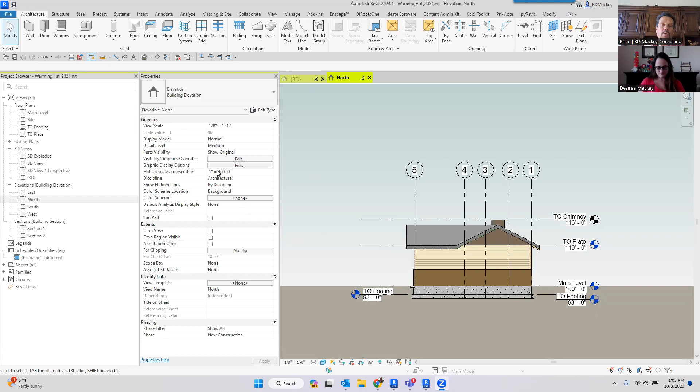So when you're in a presentation view or any view, you can go into your graphic display options and come back here and change the background. You do have options for background. You can say you want it to be gradient, or you can turn a sky on, which is so freaking dark—like, what sky is that dark blue? I don't know, but that is an option you have there.

Or you can always go in—and this is the one I want to show people—you can start putting some sort of image in. So you can grab an image, browse for it, and put it in there. This sometimes just helps a little bit when you're trying to do some sort of presentation view. Personally, for me, if I want just a color like a light blue in there, I just grab an image that's literally light blue. So that's one of those things I just wanted to bring out that you can work on there.

The other thing I did want to talk about—I'm just going to undo that because I can't deal with that dark blue. The other thing, this actually came up...

Desiree and I have a discussion because, as you know, she's got a new job and she's going through setting up Revit standards yet again for a client. This is one of those things I want to talk about, because depending on how you set it up, not necessarily just in your workflow, but having different views, tags, view types, or things like that for your working views or even for your regular views.

The client I was working with last week is a design build architect, working with a lot of contractors. What I was showing her is, if you're a contractor working in Revit, we've got our typical dimension string where we select the string and it's set up. But I don't think a lot of people know, if I wanted my default version, one after another, I can copy this to the clipboard, paste it in the same place, and drag that one into your dimension styles. This isn't something you have to do, but there are other ways to do this.

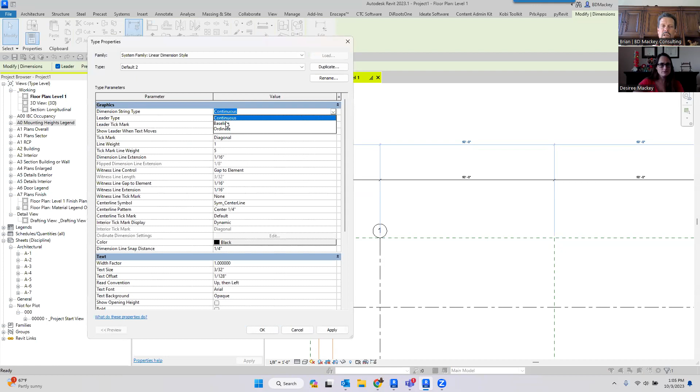Right now the default is continuous, but with that same dimension string, you can set up a baseline dimension if you wanted, or you could make it an ordinate dimension.

Not saying this is something you'd want to submit to buildings for permits, but if you're a design build firm or contracting firm, this might be easier for your guys to deal with. When I used to be out in the field framing, I'd hook my tape measure on the edge and just start going across doing the numbers myself, figuring this is 20, then this is 70, doing that math in my head. But we can set up different styles or types of things for people in the field, maybe a whole separate set of drawings.

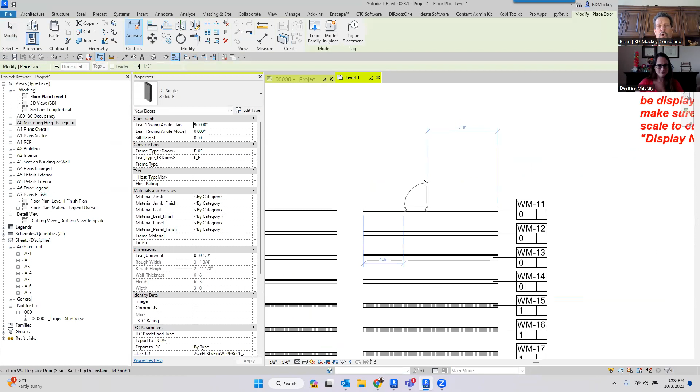The other thing I like to talk about is, for your own working views, having a whole bunch of things set up. If I come in here and look at this, I don't think I need a leader on this door tag. It looks like my standard door tag, but if I zoom in, I have other versions inside of here - fire rating, code width, actual width, all these different things. So you can start building your tags based on the data you want to be looking for.

Good morning, Melissa. Hey, I told everybody you might be like, nah, 5 a.m. is too damn early for me. Screw y'all.

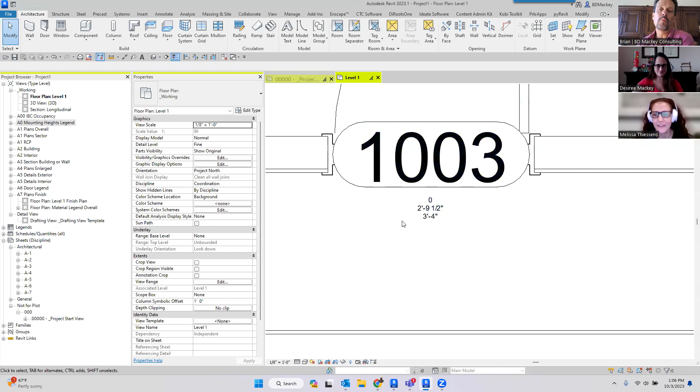So just think about different scenarios you're looking for and what you want to start doing. I know that's not the button I wanted. Desiree had a discussion and I liked it so much I already added it to mine.

Adding the view name to all of the working sections, because that way if people don't name them, it's really apparent on your working views in the plan - like, hey, this is just called Section 3, or if somebody forgot to name it. It also helps you go back into the project browser and find what it is, or start yelling at people to go create those.

Yeah, take credit for that one. That 100% came from one of my teammates.

So just think about this - you don't have to go with all your typical stuff. Think about having more of these working tags, working dimension strings, whatever it might be, that can help you or the guys on the field or whatever else you might be looking for.

I always say the same thing about view templates. I've got working view templates to put the view in wireframe, leaving just walls and room separation lines on, so I can literally see only those two things. Now I can start seeing where my room separation lines overlap with walls when I get all those Revit warnings. So I have a whole bunch of view templates to work through that way too.

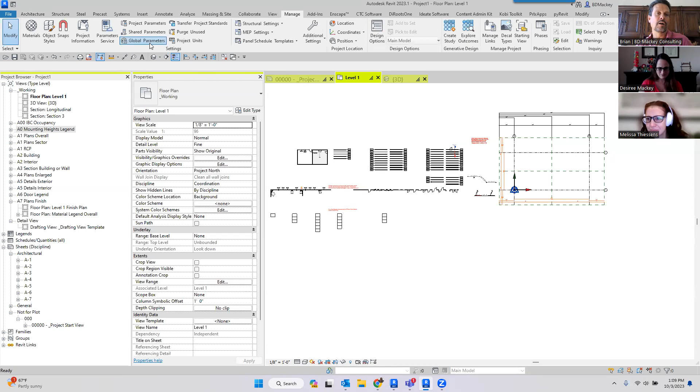The one I have in my template under global parameters is right here, and I call this my 'turn off for plot.' For years everybody's been asking, is there a no-plot layer like we had in AutoCAD? There is no such thing as a no-plot layer, though we may have invisible lines we can go through and look at.

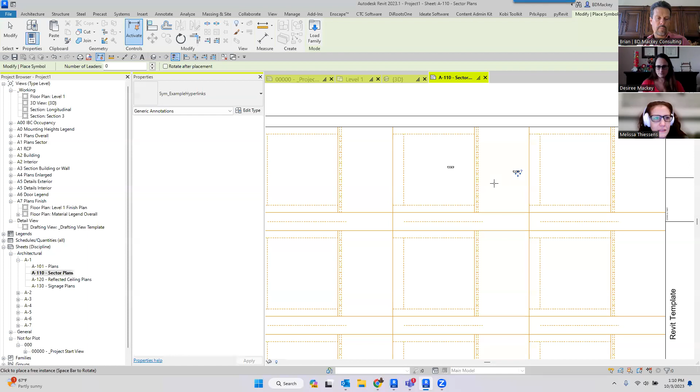Almost every firm has some sort of title block with guidelines inside it. I also have detail boxes with guidelines for people to see what's going on. I even created an annotation family that is my symbol—an example hyperlink I put down here so people can place it, then put text values. This is my text value, this is my additional note which is multi-line text, and I could even add a hyperlink. So I've got all this stuff inside here.

Behind the scenes, all of those things have visibility toggles like almost everybody has. I've linked those visibility toggles to my parameter called 'turn off for plot.' So if I go into my global parameters before I print, I can untick this. On a real project, unticking that can take 4 or 5 minutes if you've got 600 sheets and 5,000 details using this example hyperlink thing. But you'll notice it's all gone, just disappeared—they're still there. Now I can go hit print, or go back to my global parameter or hit undo, and bring all of that stuff back.

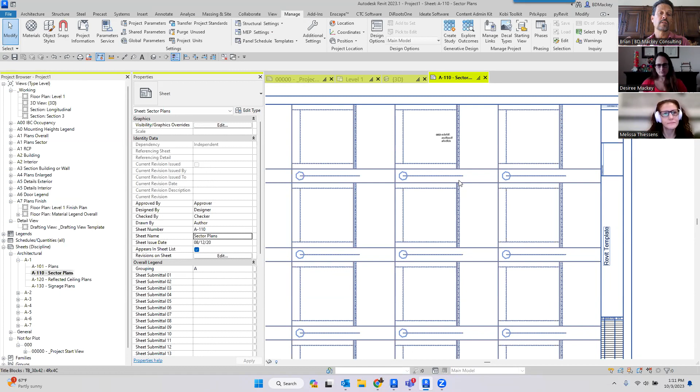So this was one where I was doing a presentation on global parameters, and somebody asked a question that clicked into my head saying, wow, this becomes huge—we can start linking things like this to global parameters. I've got to open up another file.

The other thing I like to talk about with global parameters, which is more not standard practice because we can link global parameters to a whole bunch of things, is that you can start using global parameters for 3D modeled stuff.

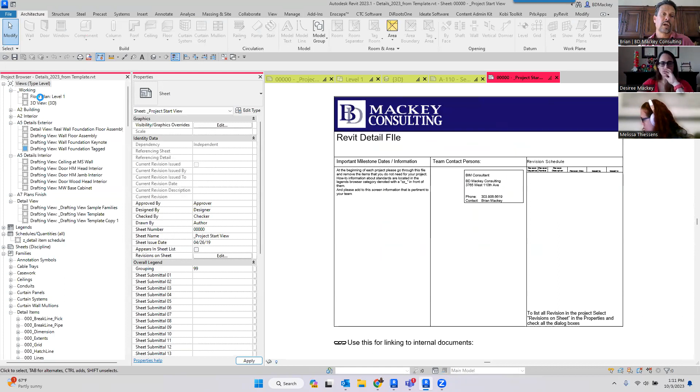In this example, I have a client who does this on all their projects: in my floor plan I have a slab. If I edit this, I want the floor, not all the structural framing. If I edit this boundary, I did a dimension from the grid line to the edge of my slab—it's a sketch line, not picked walls, nothing set there, I just drew a sketch line. Then inside my sketch mode, I did a dimension between the grid line and the slab edge.

This could be face of wall, whatever you're doing for this. I called it slab edge. I did that dimension, selected it, and associated it to a global parameter called slab edge. So now in my project, if that slab edge detail isn't 6 3/8 of an inch, I need to go to that global parameter and change the slab edge value to something different, like a foot. It's going to adjust my floor accordingly.

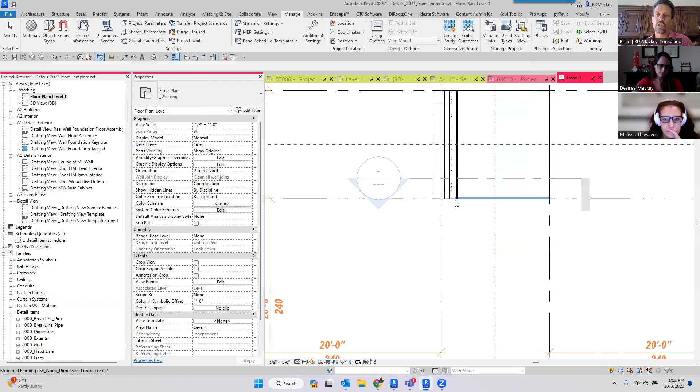But what's cool is if I go into my 2D detail, I think it's this one. I have drawn the detail item in one of these 2D details. I don't remember which one I did it in. I think it was this one. Maybe it was this one.

So in this one, you can see I now have a slab edge. It looks like I broke it and did something wrong, but I should have dimensioned that not from the edge of the plywood, but to here. So now when I go through and change that global parameter, it's not only going to update the 3D model, it's updating the rim joist, because the rim joist is going to move independent of the floor itself.

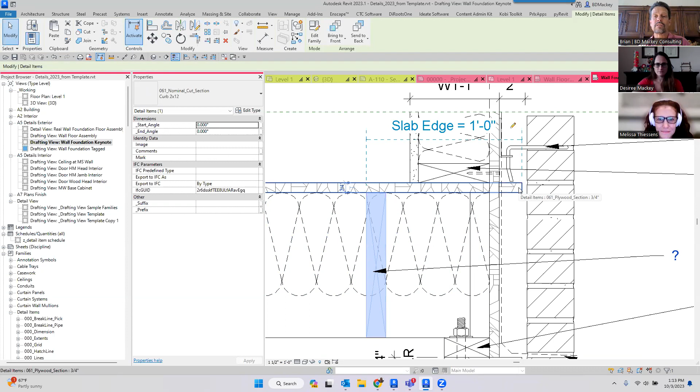So I maybe have dimensioned it to the rim joist, maybe to this detail component, which is the plywood, whatever. But you can start linking those global parameters not only to the 3D model elements, but using those same dimensions, linking it to the dimensional side of things as well. So yeah, there's a ton of different options for that.

You're gonna have to talk faster. You have a ton of questions. I have a ton of questions coming. Okay, I got one more to do on this one. I just got to find... conference. So that's all we need is Mackey talking faster.

Global. The other one that I came up with, and this was a conference. Come on, I'm in my search in Windows 11, global.

So one of the things that came up is global parameters in design options. Does anybody remember what presentation I did that one on? RTC or BILT 2022.

Do you find that in larger user environments, folks have a harder time tracking those sorts of uses on global parameters? Yeah, so definitely on that. It's one of those things where the team needs to understand it. I had a client where somebody went in and deleted the floor, which probably had 35 or 40 sketch or global parameters assigned to dimensions. All of those global parameters were lost.

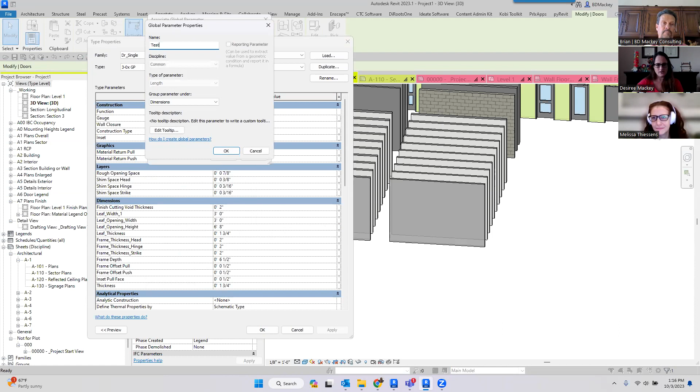We're just going to call this one my test. So I've got this test global parameter now, and I've got this dimension set up to the global parameter height. Well, I also want to come in here and put a reveal in, right? So maybe it's going to be curtain wall mullions, anything like that you can start thinking of.

So I'm going to go to the architecture tab, go to wall, go to reveal, and put a reveal in here. I'm going to say done. Now, when I select this reveal, I want to make this permanent, but I'm in 3D, so let me go to an elevation view. Oops, wrong project.

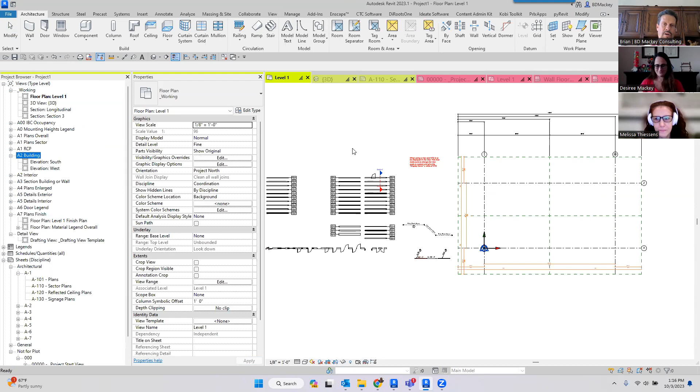Let me go into an elevation. I was just working with that, that's details. I don't have a north elevation. Cool, fine, let's do a section. Look at this here, flip it. Change it. There we go.

Link to your blog in the chat. Oh, thanks, Tom. Yeah, there we go. There's one of my blogs too. Well, there you go. Great, that's all you need.

So now I've got this global parameter, right? And if we were trying to move a reveal and adjust the door, we would have to copy this whole wall along with the reveal, along with the door, into a different design option. And then that wall wants to move out 6 feet, something like that. I've got to go move that wall as well.

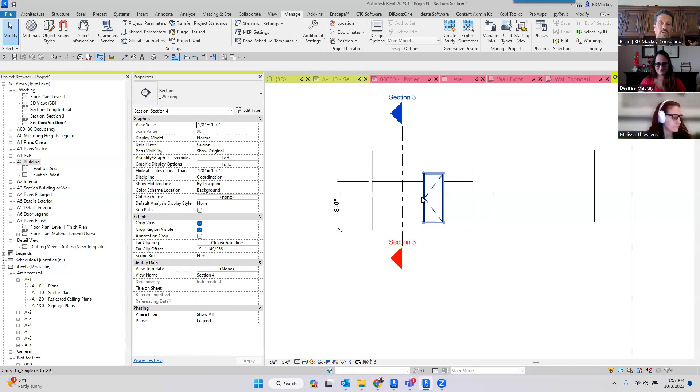But the beauty of this is now that that's a global parameter, I can come in here and say, okay, cool, let's just go to my global parameters and take that test parameter and say, that should have been at 8 feet. And since I've set this up, I've now changed not only the height of the door, it moved the wall. Like I said, that reveal should have went to the level, not to the bottom of the wall. That was cool, wasn't expecting that.

But I can start setting this up to make those reveals move, make the curtain wall grid lines move, anything that you're talking about like that as well.

So the reason why I did this is I had a client, they were doing this giant convention center. And that was one of the options, like, oh, well, we want to change this, the doors maybe to be from 8 feet to 10 feet or whatever it was. We want to make, then if we do that, the louver heights have to change, the door heights have to change. And there's this whole string of things that we're going to go through.

And I'm like, I really don't want to have to copy the entire exterior of the building to do this. So I also, because you don't know now, am I on option A or option B, we actually created 3D model text that we would put in the view. And therefore, when we printed a view, we'd have it say option A or option B. And we also got crazy with formulas.

So in those global parameters, we said, let me go create a new one here, and we'll just call this option A. We made it a yes/no parameter. Cool, and basically we said, okay, if option A, then 7, else 9, right?

So we created a little toggle that basically when you toggled this, boom, all of those different things would start to move. So in their project, they toggled option A, and when they did that, boom, this all went to there.

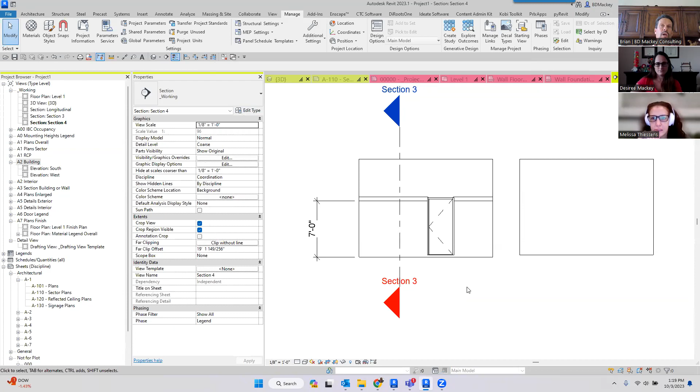Downside to this is you have to toggle it, print, toggle it again, print again for your option A and option B. And rather than even setting up two separate sheets, like I said, we created model text in here or symbols, we did both. And then we basically said, if it says option A, the text will be option A. If it says option B, the text will be option B. So we were able to, when you were printing, know which option you were printing based on what was toggled.

So yeah, global parameters are much more than just what you see out of the box, people associating them to materials or a few other things. You can take this pretty far.

And when I taught one of my global sessions at AU, one of the tract home builders came up to me and said, this is intriguing. They've been doing this with other ways, but they're going, man, this could really start taking into consideration a lot more of what we could do, for, oh, if you toggle option A, that means the garage gets 6 feet longer.

We could move the grid line, we could move the walls. If roofs are picked with the pick walls tool, the roof's going to follow along. So in some of their different design options for these homes, they wanted to go from option A to option B and have the windows get bigger or something like that. Unfortunately, we can't use it for family types, so you'd still have to swap out the family types. But in their early preliminary designs, it was a beautiful tool for them to start setting up.

Hopefully that answers that, along with thanks to Tom for clicking a link to my blog on global parameters. I don't even know if that one got into design options, I'll click the link because I can't even remember if it gets into design options as well.

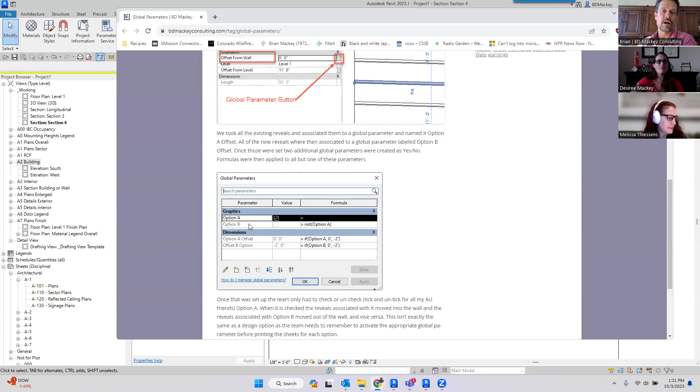Yeah, look at that, another one. So here we go. You can see I got in there option A, option B for the global parameter button. This literally came from working with my client - oh, we needed to move this up or down, or if there was option B, there was only two, so we toggled it off, etc. We got really far into figuring out what's going on here and what's not. And since you can't toggle off reveals, we actually just use the offset from wall. So there's a lot of things you can do with global parameters. As a follow-up, you just need to make sure the entire team knows, hey, we're going crazy on the global options on this one.

I'll just go in order so I can catch up with the ones that came in to begin with. Oh my goodness, you've got like 5 hours of content here. Using railing supports as balusters - thoughts? Absolutely.

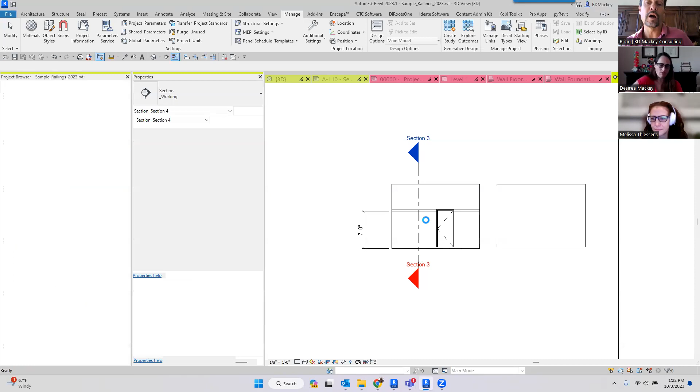Yeah, this is something I talked about very early on with a sample railing. I don't remember when we got railing supports, a long time ago. Tom here had tweeted out a question to the group like, hey, how do you do spiral barbed wire fences? This was because of Tom. I already had a barbed wire fence family here, but then you start looking at it - let me rotate so you can see. I had normal barbed wire, and Tom's like, how can we do this?

This is one of those things where if I tab select, you can see this is a railing support. One of the nice things about railing supports is you can say, hey, keep repeating this. And it's not like a baluster - you can come through and do better shapes than you can with balusters, and you have more control over them.

The other reason I really love supports in lieu of balusters is we've all probably come in and created some sort of glass type handrail like this. But when you get into it, you're like, cool, but I have a weird size in the corner, or I need to align this with something else. If I grab a support, I can always unpin it and move it wherever I want it to go.

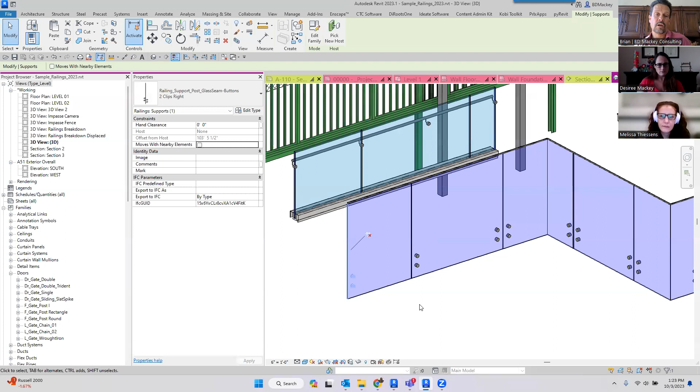So that's how I got the one over here. This one's still using the default supports, all the 4-clip, but at the first one I had to tab select to get to it, unpin it, and change it to be the 2 clips on the right side or the 2 clips on the left side, etc. So yes, you can go through and start setting those all up.

Even on just a typical standard handrail - oh, this is really cool, but I want to be able to grab this support and this baluster and move it. Cool, that's not a baluster, this is simply a support. So now I can put those wherever I wanted and start moving it and doing what I want to do with it.

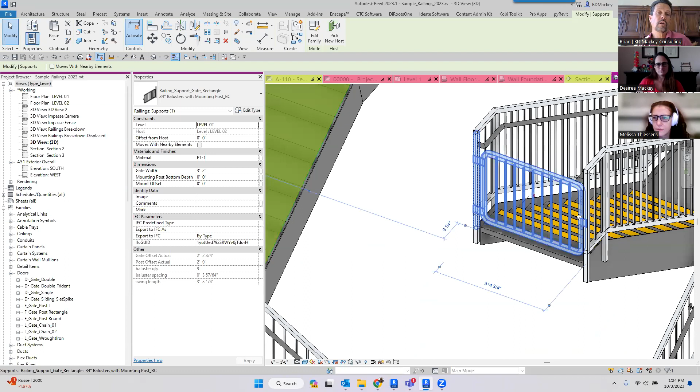Even to the fact, like up here, this little gate you see - this is my first support. So this handrail is not using balusters but supports, and I just went ahead and selected the very first support and swapped it out to be a rectangular support with a gate. Now, granted, I've got to have 34-inch, 36-inch, whatever different sizes I'll need, but I have the capability to do that. So yeah, I am a big proponent of using supports in lieu of balusters all over the place. I don't do it everywhere, but I do it in a lot of locations.

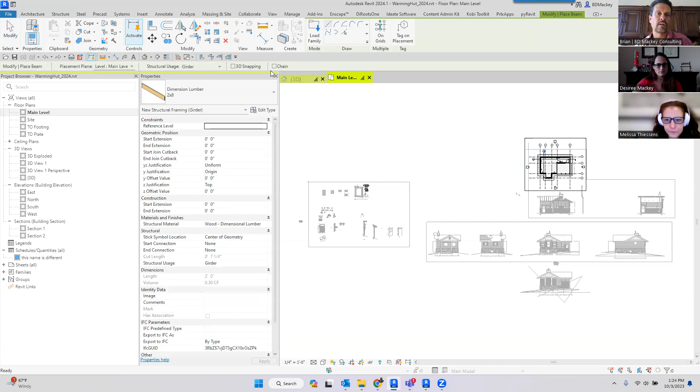Is there a good way to disallow join for multiple beams? I don't know if there is. I was trying to think of an answer for this, because it's not like you can just go back. I feel like the opposite is often true - you want them to stay connected and then they don't. Like you hit tab to select a chain of beams or lines, and suddenly you only get 3 instead of the whole thing. I was trying to think, if I go to beam, there's no disallow join option like we get when drawing walls. Right, it is what it is.

Could you select every other one, move them all up to break it, then move them back down? But they'd grab each other again. Even if you selected all instances, you'd have to do every other one to break them. The only way to disallow join on those is to right click on the grip and say disallow join. So it's not like you can even do that without using some sort of add-in utility. I don't think there's a way to globally or quickly disallow join on structural framing.

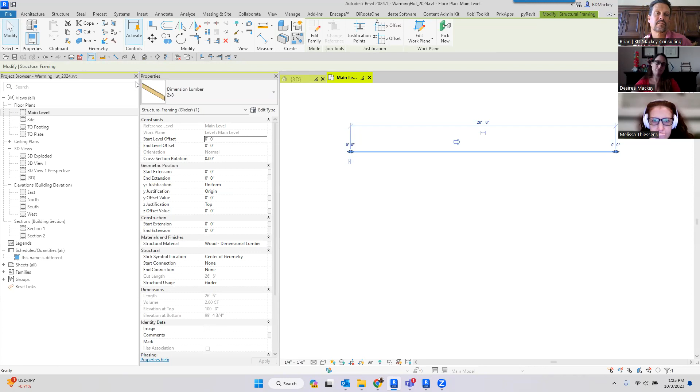Can you disallow the join as you're drawing, like on walls? No, I can't, because there's no disallow join button here. Right, we've got nothing for you on this one.

If you disallow join and then copy it around, is that at least better? Oh yeah, I think that's true, Melissa. Until you have to stretch it - does it try to grab again, or will it remember disallow? No, it's disallowed here and here. So let's try another beam, the perpendicular one, copy it down and see if it tries to grab it. Still copied over disallowed, even when you stretch it. Huh, even if I did that - so there you go. See, Melissa's got a good answer, and she's half asleep. Everything is disallowed.

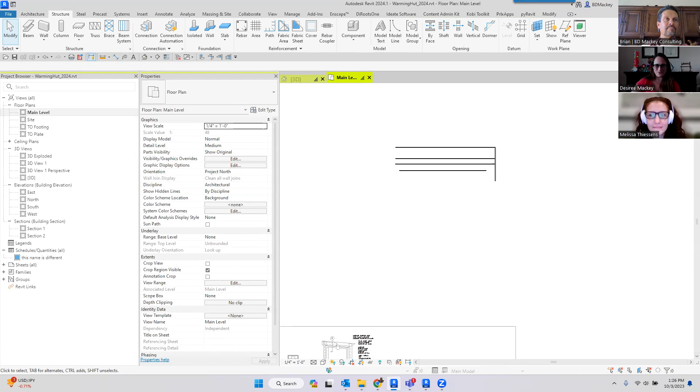Hey, it's cool, daylight savings was Sunday, so it's 6:30, it's totally fine. Oh that's right, you guys are in the middle of daylight savings there, which we're not on for another 3 weeks. Yeah, only for a couple weeks and then back to normal. I'm gonna be all messed up - Australia goes first, and then Ireland goes before us too. So all my countries are gonna be messed up, I can't keep track of what time it is anywhere.

Okay, last one I think before Melissa has them. How do you recommend cleaning family subcategories on the project? We're trying to swap some that have typos, for example glass with 1 S versus glass with 2 S's, or find other ways to get rid of unnecessary categories. First off, why are your categories material specific? I have problems with that. But barring that aside, because you can put it on the glass subcategory but call it metal, and then it's just confusing. I say that with doors too - the out of the box door categories, that's what we have.

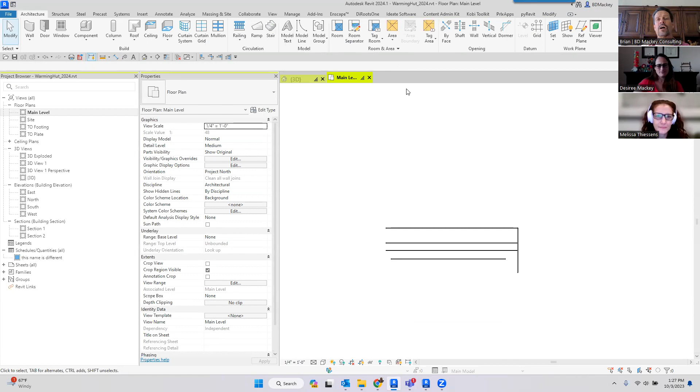Personally, for me, there's a lot of different tools out there. I use Ideate for all of this, and I know this is an add-in tool, and I don't usually plug these on Revit Radio. But with Ideate, they've got Style Manager - you can do something similar with Guardian too, it will let you do it. When I go into Style Manager, I can start seeing all of the object styles in a project. If I analyze that, it will then tell me all the families that are using that object style.

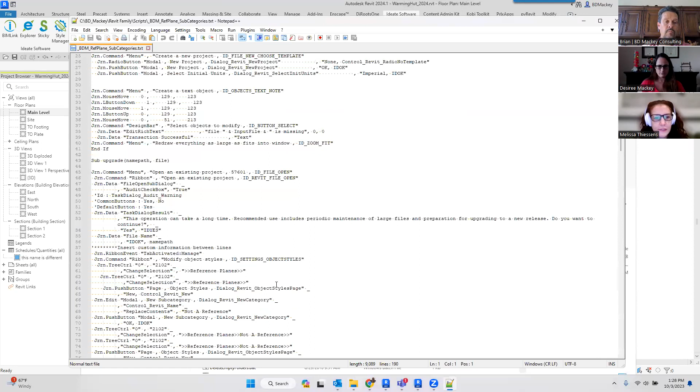I don't think using native Revit to try to do all of this is going to be easy. Now, you could use scripts, which I do have - by scripts I mean journal files in Revit. So if I go into my Revit families, into my scripts, I have a lot of different journal files that will set this up. If I came in here to, like, reference plane subcategories and edit this with Notepad++, you're going to see that inside here. I'm coming down here trying to say, let's go create this new category, not a reference. So I've come through here and said, I can go in and create new categories, I could even go through and rename categories. So when I get certain clients, they're going to say, I wanted to rename your category from this to that, etc. I'm trying to see if I have any of those in here.

I've taught this at AU, so it's there if you want to download the presentation, and you can use a journal file for that. But again, a journal file will fail if it doesn't meet the criteria. I'm sure there are other add-in utilities, I know Guardian has one, and I'm sure you could probably do it with Dynamo too, but manually trying to go through and do that becomes a pain.

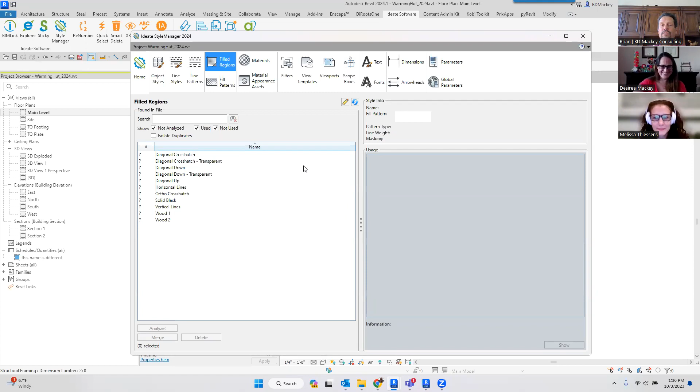It'll go through and start letting you know, oh, these are the families that are still wrong, so you can go edit those families to change it. This tool isn't going to edit the families for you, but at least it'll give you a list of the families you know you need to go change.

Inside of a project, you can just say, I don't want parking stripe in there at all, and delete that. If I delete it, the family is now just going to use the parent category instead — so it'll use the parking category, not the subcategory of parking space or parking stripe.

So that's just one of those things for me when you start looking at it. That's what I go through and start getting into. Hopefully that answers the question. Natively, there's not an easy way to do it — I'd be using some sort of add-in utility. And even if you've got to buy that utility for a year, it's probably going to save you the money it would take to manually go through and fix all that.

Ideate's getting some love in the chat. Too bad we don't have anybody on the call, I don't think, from Ideate.

I think Guardian will do the same thing, and Guardian might even — I'm not 100% positive — say which families need fixed, and there might even be a way to tell Guardian to go back and fix those families, but I could be incorrect in that. Okay, all yours, Melissa.

Michael says CTC also. Yeah, CTC I know has one. Oh, Ideate's cheaper than Guardian. I always assumed Ideate was kind of on the spendy side. It's a bit on the spendy side. I mean, but I don't know.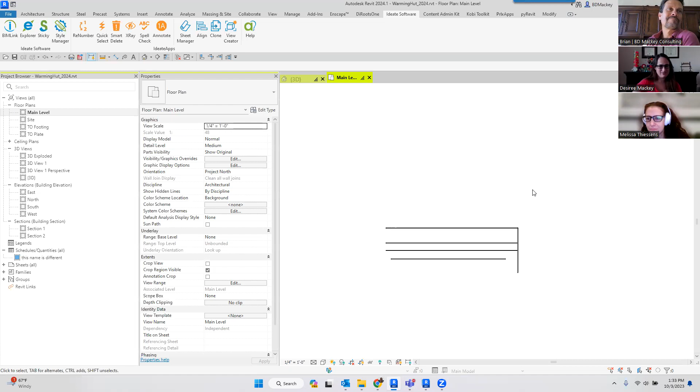Loving the chatter, you guys are feisty today. You mean yesterday? You mean yesterday? You guys are feisty yesterday. We're feisty yesterday.

Okay, all right, what's our next one? Well, next one we have. Oh, did you? No, I was just saying. Go ahead, I think you have them all now. I think so. You can go hurry and spell check everything that you've ever written. That's so nice of Brian.

So since you were talking about journal files, Sarah was asking, they recently decided to make a section tail flag for details a little smaller. The template setting is easy, but we have active projects that we would like to fix these in. Is there a way to automate or batch that? So they just want to change the detail call out, not the building or wall sections.

If you did transfer project standards, would that work? I don't think it actually carries all the way through, last time I tried that, because it seems like it should. Let's go to 23, because I know I have 2 projects open here. Let's go to manage, transfer project standards, check none.

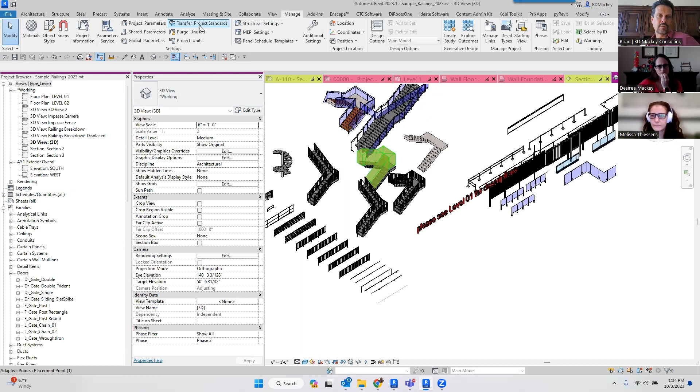I think you're going to get all of them. And even then you're opening all the projects, right, and doing it all at once. Yeah, but when it's better than if I manually remember going right through, it doesn't actually set something, but maybe that's fixed now because I gave up back in like 2020.

Well, I'm not even seeing like section tag types. It's going to transfer those. So as long as you didn't rename it, I think it would swap the section tags out. Let's see. You know, okay, try it, because I remember thinking it should work, and then it just didn't follow all the steps. Oh, so yeah, it would overwrite just the detail ones.

Well, brought this one across and gave me the number. It seems a little blind though. Like I know it'd be more labor intensive, but to load it in and swap out the definition for just the details, I guess it didn't. Where's that summer intern? Summer intern.

Well, the one thing that even if you renamed the family, I always try to show people is if you right click in the project browser on a family, you can say reload. So yeah, even if you came across and said, hey, we renamed this to be, it used to be called section head working, and now we call it section head working with detail. Don't go load that family in and swap that crap out. Come over here in the project browser and say reload. Because when you say reload, then it's basically just going to swap out X for Y.

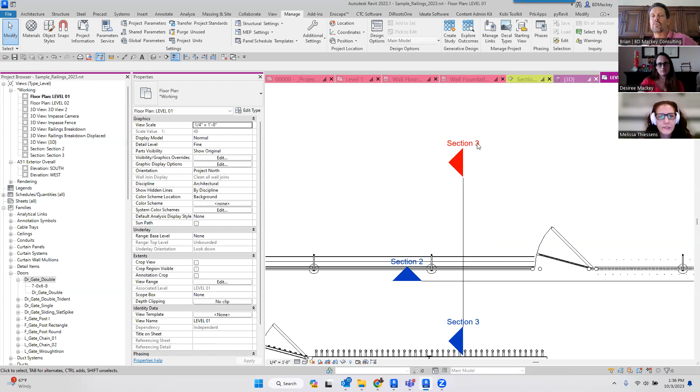I think what Brian's trying to say is that if it's named the same, it'll swap. And if you have your detail tail different than your section tail, if you reload the family with the two types, right. But even with that said, so if I renamed it, yeah, this one was just called section head working, and I added this to it. There wasn't any other properties. It updated in here automatically. So yes, going into the manage additional settings.

Annotations, section tags, zoom helps. If you've changed the detail it's using, yes, you've got to go through and do that. But if you're just swapping the family out and it was using the same exact name, it should just work.

So my guess is if they just changed the section ones, they probably were all using the same tail or head. Would that be correct, Sarah? Because I feel like that's the issue I ran into as well. Unless they created a new one, called something different, and it was already using a separate one, that would be easier.

But what it makes it sound like is she said we created one for details. It makes it sound like it was a new one. Correct me if I'm wrong, Sarah. But once you've loaded it in here, yeah, so it'll work.

But now you're still going to have to go in and say, I want to grab all the ones that are details and swap them out. Now that's not going to be horrible because you're literally going to grab one of them, come up here to the edit type, and change it out to use the appropriate head.

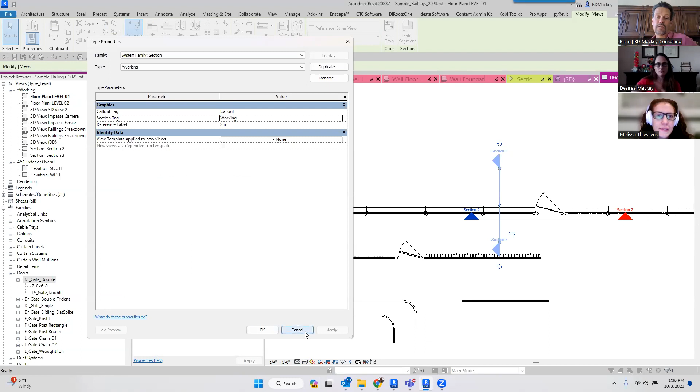You're going to have to come in here because you've loaded it in, just swap it out to be the right type of view. But yeah, you've loaded it in there, but you're still going to have to choose which sections, which ones were details versus this, etc.

You're still opening every project. Could you run a journal file for those steps? You can't, but you don't know which sections you're grabbing, right? I mean, I guess you're grabbing view types more than likely and just saying, hey, swap this view type out. If they were already their own view type, then sure, edit type, and you're going to bring this in here.

And if that's the case, I would think you could just right click and say copy - can't copy views, what am I thinking here. Because for the drafting view, you could copy the drafting view type, it would bring it across along with the section head. But if it's a live view, then it's not going to. So yeah, I got nothing.

Yeah, summer intern it is. We're just trying to make America great again by hiring a whole bunch of interns to do manual work. Making sure everybody gets interns. Sorry, I've been watching too many political ads lately.

But you made me think I'm actually going to open my template right now and make sure I have those things named separately in case I want to change them. Good idea.

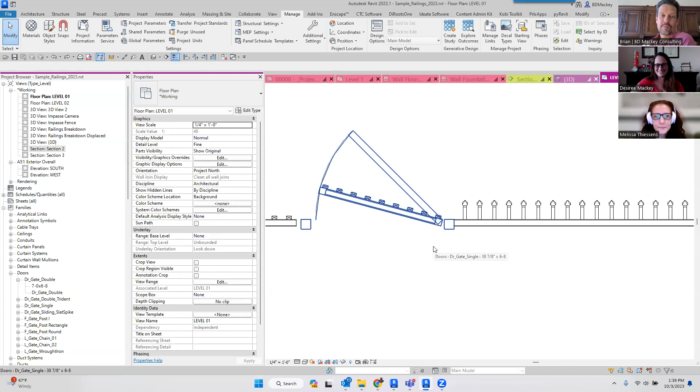Wow, my gate family broke. Gotta go look at my gate family. Okay, all right, what else we got?

Well, there is actually one that is 2022 specific, so maybe you should start opening that so we can test and see if it works for you.

Beautiful. And in the meantime, I apologize to Sarah. Sorry, there's no easy button for that. It seems like there should be, and yet no.

I have a different one for my working sections, but my printing sections and my details are the same. Dang it, Sarah, now I have to change them.

Let's see, well, that's opening. John is saying, huge fan of your link detail strategy. Any new updates since the AU 2013 presentation?

Look at that, a decade on. I think I already have it. Yep, it's changed over the years, and I don't remember which one was which. Yeah, this is my details one. Couple of things that I know I've changed probably since the last time I presented this at AU.

Am I in the details file? That's not the details file. I just got to figure out which file. No, that's the handrails file. The pink is the details file. So probably only a couple things that I've really changed.

One, I did talk about possibly linking global parameters to this stuff as well. But one of the other things when we start getting into it, is I started taking the use of filters more into play when I look at things. So still talk about everything being intelligent, etc. But one of the things for me, if I were to come in here and grab this concrete, I'm going to go back to fat lines too - this will be a little bit more impressive in fat lines.

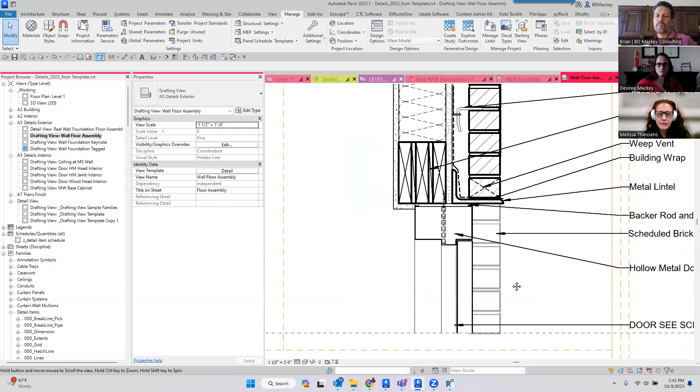If I were to come into the comments and type something in like beyond or existing, the second I type in that word beyond, I'm going to get beyond because my tag's looking at that comment, but I also have filters coming in to start displaying what's going on. So for this view, I've got these bricks here. I didn't want to have to go through into these bricks, right click, override graphics in view, hide this, change the line weights to be gray, and I was going through doing that. But once they gave us filters for detail items, now I can just add the word beyond to it and it'll start coming into play.

If I select host and come into this brick here and change it from beyond to like existing, I have a filter for existing where it leaves the hatch pattern, but just changes it to be gray. So I've added a lot of filters to start controlling some of those things I'm looking for.

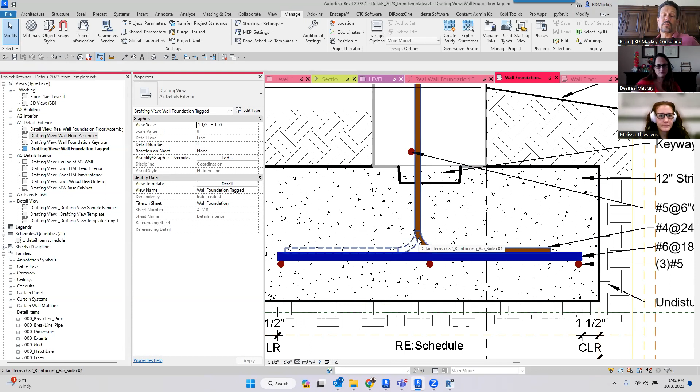Same thing for my structural engineers. I have filters for 3D rebar as well as 2D rebar, so if I change this from a number 5 to a number 6, the color changes. So my 3D rebar and 2D rebar are all color coded based off size, and I'm not creating different families for that, I'm using filters. I stole this idea from one of my Canadian clients way back when—they wanted different sizes to be different colors, but we didn't have filters back then. So literally, in the family, I created 35 extrusions or filled regions, all different colors, the exact same thing over and over. So number 6 could be purple, number 7 or the M10 could be whatever, going through and setting that. I've really taken filters into consideration.

I can't remember if 2013 we could actually do schedules, but I now use schedules for all my detail components—not just to see what's going on in the project, but to spell check, because I might have spelled some comments or suffixes wrong. So I come in here and say, what am I having inside of here? What's going to go inside of here? Exporting this out to Excel, doing a spell check in Excel, making sure it's all correct—I've done that stuff too.

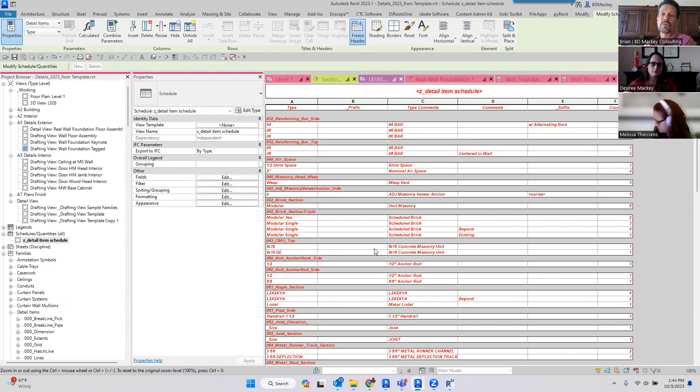And even more, I don't think this is in 23.1, I can't remember—was it 23.1? It was. You can now say filter by sheet. So I can literally, on a detail page, filter out all of these things and have it in there with all the comments, etc. I can have a schedule on my drafting view, on my detail sheet, of all the different components I've used in that sheet and in that sheet only. So it's not going to give me all 5,000 detail components I'm using—it says, in this view, these are the details you've used.

Did I actually check that, or did I say cancel? Filter—filter by sheet, I'm looking forward to that. Okay, let's go to a sheet. Do I actually have any of these on a sheet? Ooh, I do. So now I've got this one thing on a sheet, and I can drag that one schedule down, place it onto the sheet, and those are all the detail components I've used in this one object. It really makes you understand, wow, I've used a crap ton of detail components in here. It's not listing everything, but it is listing the things that are in this view, and theoretically, if I delete that view, all of those go away.

There's a follow-up question down at the bottom: are you finding that people are starting to use color in their plans?

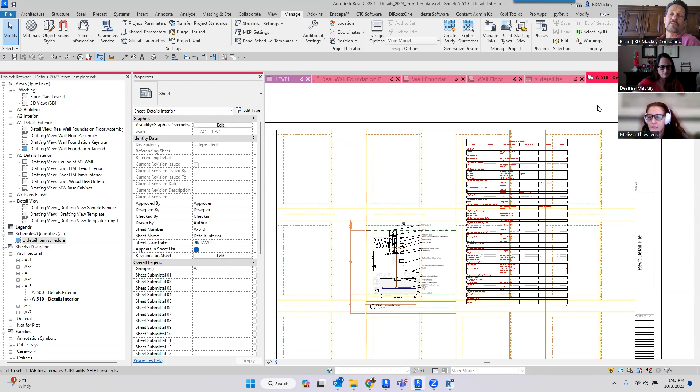I am—especially now since 90% of people are looking at PDF anyway. I know we still have to submit for a lot of jurisdictions' documents, but we can usually submit those via PDF, they don't have to be printed. Some are printed, but most of my clients are starting to do things in color for the intelligence of color, not just for color's sake. We're not back to the AutoCAD days where blue meant wide lines, green meant this, etc. We're getting more and more into the concept of doing colors for intelligence's sake—even in my templates. Most of my clients now are getting it.

Let me go turn this phase to a different phase. Where's my phase? I'm blind right now.

I need to set up my walls. Why am I not seeing phase in here? Down here, because I didn't scroll far enough.

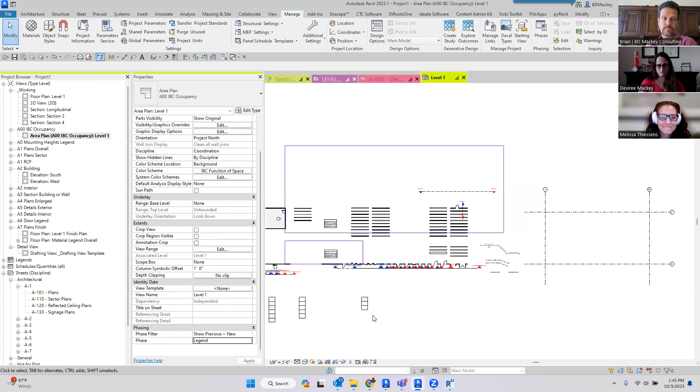A lot of my clients now, and a lot of their code plans, are color-coding rated walls based off of the fire rating, but also whether it's a smoke barrier, smoke partition, or fire barrier. They're getting into more of this, saying all our code plans are done in color, and it even says in the title block to print this sheet in color. Most print companies and facilities now, color isn't that much of a cost difference compared to black and white like it used to be 15, 20 years ago.

Michael adds that he makes sure that even if we print in color, it also shows up well in black and white, with a nice grayscale instead of just being all color or all one tone.

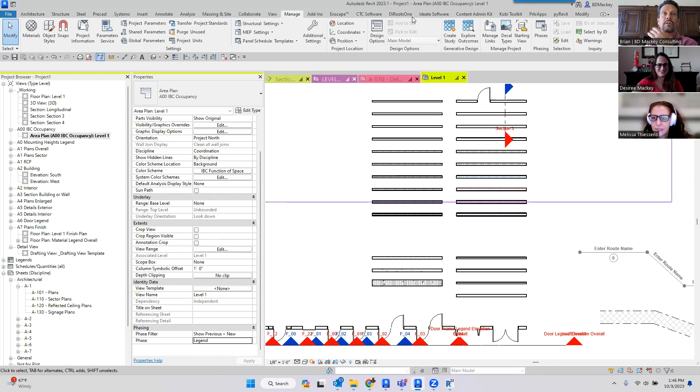What's your plan for your unanswered questions? What unanswered questions? You have about 7 left. We're good, keep going. Okay, I just need to start talking faster. All right, how about Pal?

Is there a way to avoid pressing the fix group button, or is it sometimes inevitable? I have a particular level situation when trying to change levels distance, and it keeps showing up.

I think the answer is groups, you have to avoid groups if you don't want to ever have to fix them. Yeah, pretty much. I think the big thing is understanding the nuances of groups, like when you make walls, always make them unconnected. Never have them go from level 1 to level 2 - keep them level 1 to level 1 with a 10-foot offset.

I don't even make them unconnected personally, I make them go from the level to the level, unconnected. Melissa, I don't know what you guys do, but I know you use a lot more groups than I do.

Not using any line-based families - I don't care if you're in a detail group or a 3D group, line-based families will blow it up. Also never include handrails or stairs in groups, because those will blow up as well.

Are you ever going to get the capability to not see fix groups? No, it's going to come up. You have to understand that, and if I fix this, I've got to go back, create a new group, swap all the old groups out for the new one, and then purge the old group out if possible. There's just a ton of nuances to groups that you have to get into and understand.

It's also why most of my families, with the exception of things like doors and casework, I don't have wall-hosted families. Most families are unhosted, because if you start getting into groups - yeah, my toilet accessories don't move off the wall if the wall moves, but if they're in a group, then they don't blow up. You've got to understand those things and how to manipulate them to minimize issues. But no, you're never going to get away from the non-fixed groups issue entirely.

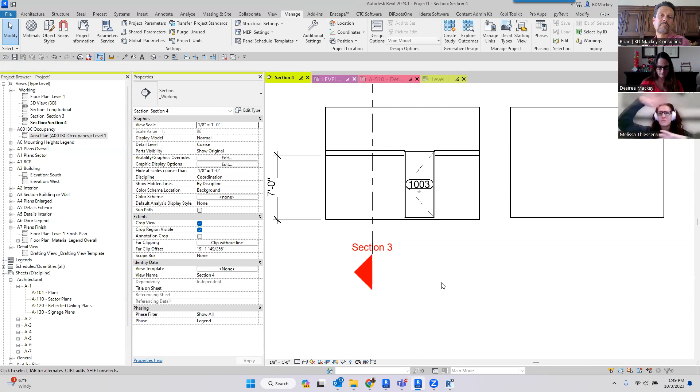Rick is asking, is there a way to tag windows on elevation views other than plans? Yes, use the tag command. I'm a little unclear on that one. Rick, I think we need to follow up, because you can tag in elevations just as you can in plan. At my last job, with some crazy facades, we did a locked 3D view - we had 3 or 4 views and we were tagging them in 3D. But I don't know if that answers the question or not.

Yeah, so if you've got it locked, then you can also tag in 3D as well. Just don't model windows, you only need rough openings. Who cares? So yeah, you can follow up on that one, Rick. Cool. Otherwise, let's jump to the next one.

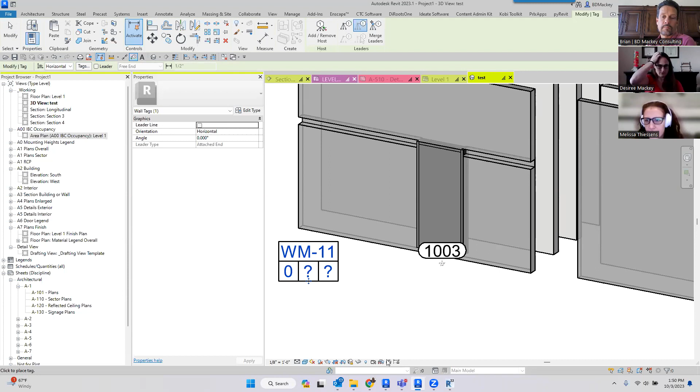Any thoughts or solutions? Well, any non-rectangular panel has to be a system panel. You can't make a curtain wall or a custom panel that's non-rectangular. It just, Revit doesn't let you do it. So even if I were to come in here and edit this profile, draw an arc.

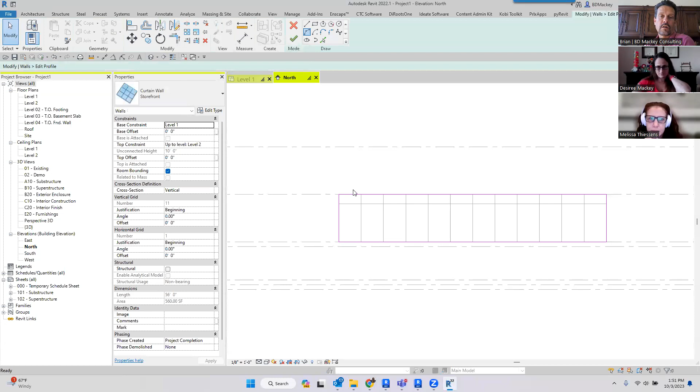I did exactly what I tell everybody not to do, always cut away from the wall, don't ever add to. You should be able to do it, but again, you will not be able to have panels that are non-system panels. Custom panels have to be rectangular in shape, and not even parallelograms, they have to be rectangular. Once they become non-rectangular, they can no longer be custom panels.

Yeah, I don't know the exact answer on that one because I just did it. It just has to be system panels, not custom. All right, so I guess we need a follow up.

Oh, and Rick says plan has a symbol but size on elevations. So he's got some sort of tag that has a fake dimension built into it, I'm assuming. It looks like a dimension string with a symbol in it in plan. Symbols only show up in plan views, so when you're looking at your window in elevation, no, you can't get it to work.

Symbols only show up for most family types, certain family types. I start with a crappy template, trying to think which ones those might be. It's an electrical family. So if I go File, New Family - come on, where's my MEP people? I know you know what I'm talking about when you do a template.

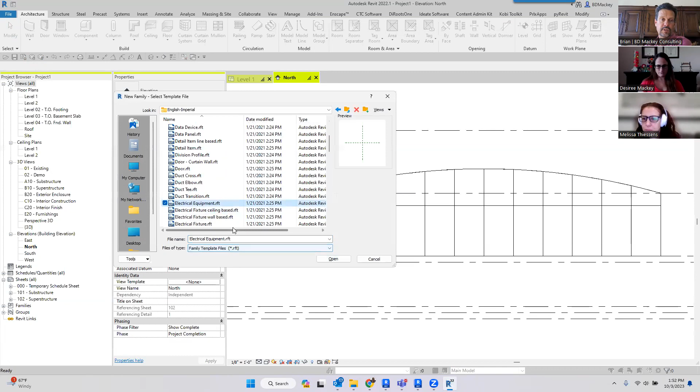Some of the MEP families have the capability to say maintain annotation orientation, which will sometimes allow that orientation to show up in other views, but again it's only specific families. I actually think that might even be the way it displays, I can't remember. But yeah, it's a known thing with Revit that nested annotations in a family only show up in plan view. So if you've got some sort of tag where you're showing the width of this thing, you're only going to be able to show that in plan, not in an elevation.

You could just tag it separately in elevation, right?

Somebody asked, can you create a non-rectangular family with massing? Yeah, if you came in here - for non-rectangular families, you can technically use an adaptive component, which I know somebody had emailed me a question that I just remembered prior to this. So I apologize for not getting that pre-emailed question answered if you're the person asking about it. But Revit families - what version of Revit am I in currently? This is 22, sure, I have it 22 as well.

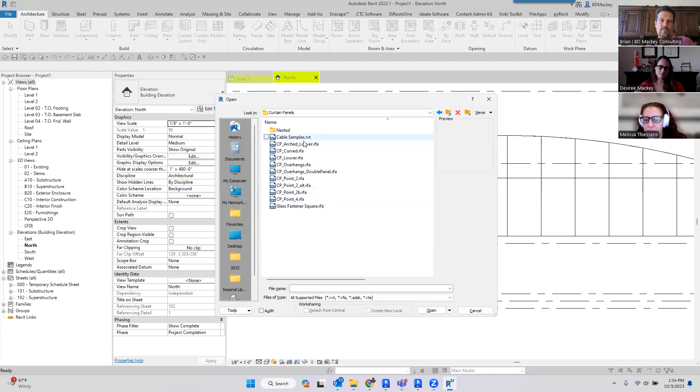Curtain panels - I have a sample family project. Oh crap, it's probably not updated in this one, I've got to upgrade it. The one thing I'll do is I have actually adaptive component families that look like a curtain panel, and I can actually pick on the corners of the other panels or the mullions or the grid lines, and get those to start adjusting. So I have an example, and I don't think it's going to be in this file, where all these non-rectangular panels at the top actually are adaptive components.

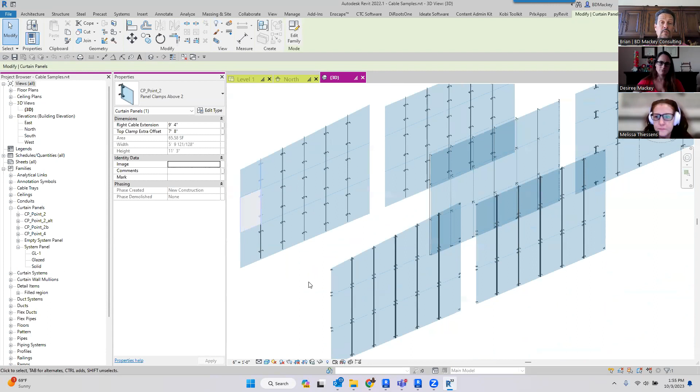In this case, I've just used a system panel, and what you're looking at down here is the panel that has those cables into it, and I just extended them up. So something like this is all part of my panel family, but I just use a system panel at the top. I do have a version in a later release of Revit where I've now nested in adaptive components in here, but it is a pain because placing adaptive components are not simple - it's click, click, click, click, click, click, click, click, click, click, click, click.

It's not like I can say automate that, but as the grid spacing changes, as the other things change, those adaptive components will adjust with it. But no, that's really it. There is a way to do a mass family, and then you apply a mass inside of there. You do curtain system by face of that mass, but then your one panel is a curtain system panel, and it becomes a little bit more crazy. But again, you have to then get into a curtain panel by pattern family if you want it to be completely custom and weird. That's going to be something you're looking at. So unless there's something like that, I don't really know. It should work, but again, system families.

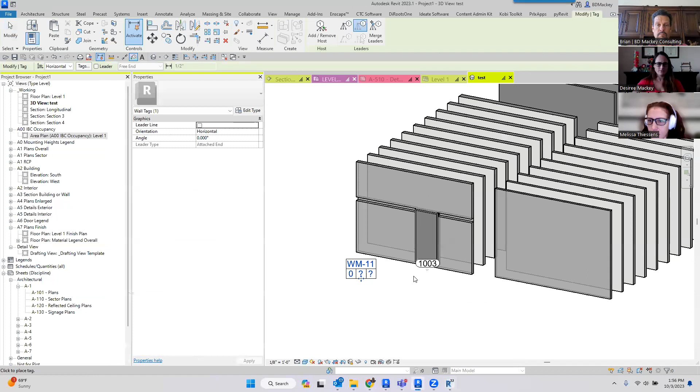Is there a way to cut voids in nested families? I was unclear if that meant cutting the nested family, or the nested family cutting something in the project. Maybe.

I think what it means is when you nest a family into a family, can you cut into that nested family? I believe certain categories you can, but not the majority of them. I think in 23 and 24, because you can join generic model families that are nested within each other, or even casework families that are nested. I don't know if you can actually cut a void out of those though, now that they've started adding the joining tools.

I can't think off the top of my head on that one. Trying to think. So if I go open, maybe an example would be good. That's what I was trying to do. I was just going to go open one of my families, trying to see if I have a generic model family that's got nested families in it. Well, this is all generic model nested in. Let's look.

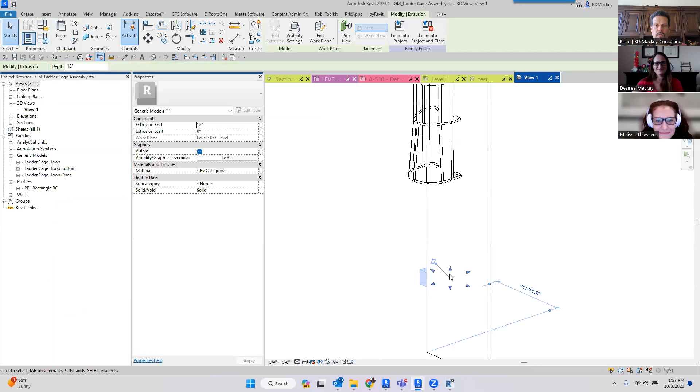So let me make sure that's a sweep, that's a sweep, that's a generic model. So let's see, can we do a void that will cut that generic family? So create, extrusion, rectangle. Where am I working? Cool, finish. Pull it up there, pull it over here. Am I touching it? Hell, I'm not even close. Pull it way over here, way up here, and way over here. Cool. Switch this to be a void.

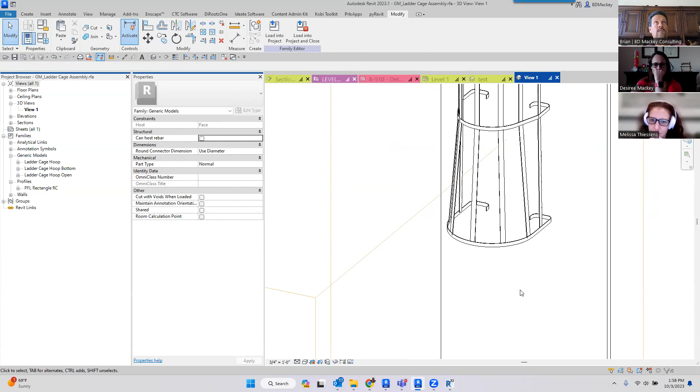Now can I use the cut tool? Oh no, because I can't even select it. Yeah, so no way to cut. So I know with generic model families now, you can actually use the join tool on them. So when you go to join, that might work, yes, I can join it to other nested families, as long as it's generic model, casework, the ones that can also be joined within the project environment. But I guess no, you can't cut a void out of that. I wouldn't expect you to be able to.

Because that family would have to edit itself and it doesn't know. Yeah, well, but when you're joining them, like if I took this and made a copy of it like that, I can come in and use the join tool, and basically you're saying, hey, cut a void out of one of those. Oh. So I guess you could do that. A workaround? You just need to nest a void, nest the family.

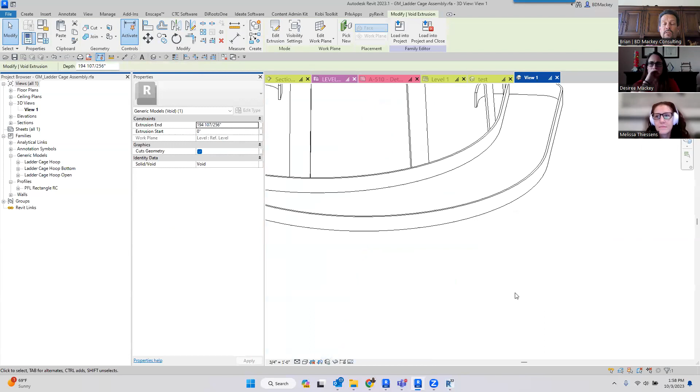Or the other thing is the void could be face-based. You can put it on. And I know I've done this with structural framing, or no, was it structural connections? Structural connections are other ones because holes can cut them, but you can nest voids in that are face-based and they will cut them. So that's another option.

But just to have an extrusion in here, what if I made this an extrusion? Let's go back to make that a solid. Then can I use the join tool and join this to this? No, it's got to be nested. So interesting, you would think the nested would be more problematic than the native one.

Okay, yeah. You have one minute. I have two questions.

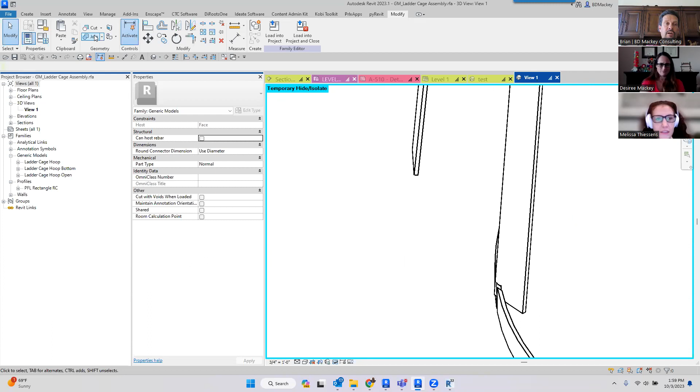So hopefully, Ryan, that answers your question. No, but you could nest in a void family or nest in it. You can nest in a solid family that's just not visible. And let's use the join in the right order, and then make that one not visible. True, but again, you can't join. It's like even here, I can't join this generic model to this extrusion. That's just a sweep, even though they're both technically generic models.

All right, this one, Ben's question might not be super quick. The answer itself is quick, but the demonstration takes an hour. Okay, so it says, I've heard of a model alignment issue from a sub. What is the workflow to make sure everything is lined up correctly, or acquiring coordinates with multiple models from multiple disciplines to produce a composite NWD file?

The simple answer is whoever the lead is should be controlling the coordinate system, and every other person working within that should link that model in and acquire coordinates. That's the simple file answer. Even if you all have different 0,0, everyone should be using the same coordinate system, with every person other than the prime acquiring coordinates from that prime model. Once that's done, when you export to NWC, it'll look at those coordinates and line them all up via shared coordinates.

A site file would do it too, right? Yeah, so if you link all of them into a site file - but the problem is most people are on BIM 360 or different models, so you'd have to link them all in, set up grids for the thing, and then everybody would have to acquire from the site file. So regardless of what it is, they should be getting acquired from one file.

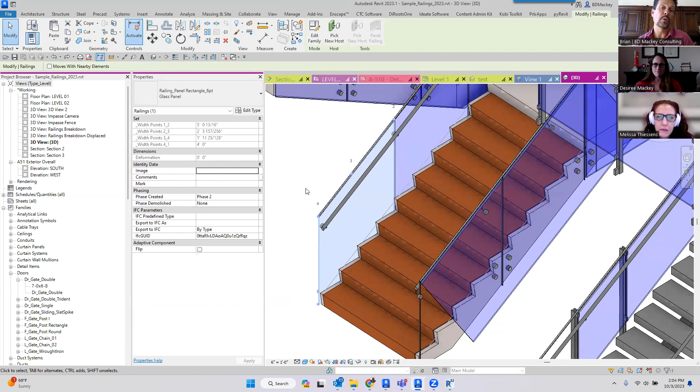So when I come in here and do this, there's no void in here, right? I'm just moving a solid extrusion around. But if you truly wanted to model that, this panel is an adaptive component - I've got a 6-point adaptive component for the base, and all the other ones are just 4 points in the middle.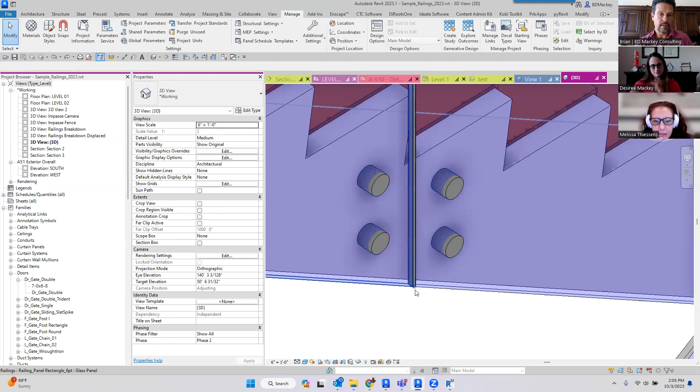What's great is I can still use those same supports if I tab select. I have one in here called stair, and I can toggle off my little gasket material. The reason I toggle this off is when that gasket material is there, I'm actually using that little extrusion to snap this adaptive component to. Once I snap that adaptive component to it, I go ahead and turn that off in the properties. Then with an adaptive component, I've got to find it - there's too many things to tab through. Panel rectangle, there we go.

Since it's an adaptive component, I can now move this - I'm moving the entire handrail. Grab the wrong thing, you tab the clip. There we go. I can move this, and as I move it, that adaptive component goes along for the ride. So we can set this up. I've used this for my structural engineers to start doing my tapered sloping footing, where I'm going from one height to another with that diagonal taper - I'll use that taper slope footing. It's an adaptive component, so if my foundations adjust or move, I don't have to constantly remember about moving that little thing.

I use them all the time. If you've ever been to San Francisco and seen the air traffic control tower, that was done back in Revit 2011 when we first got adaptive components, and that entire skin facade was modeled with Revit adaptive components. So there's a lot of different tools I use for it, and they work great - you just have to understand the nuances.

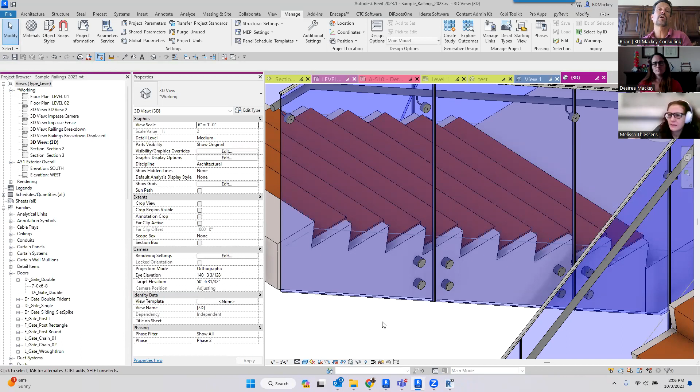One of the most recent ones I used, I had a client who wanted this elliptical handrail. I wanted to go from this size ellipse, which I have to have by code, and it flared out and came around and did this weird thing. So I did an adaptive component where I hosted it to this, and I hosted it to the ground. Adaptive components can also have shape handle points, and the user could grab that shape handle point and just start stretching it on the project to get the feel he wanted for that flow of the handrail, flowing right off the existing handrail that was there. Then it was just the sweep that I was controlling with adaptive component points, etc. So I love adaptive components.

There's a lot of nuances to them - like if certain things change, they just get deleted, and there's no warning. Like if I were to delete that support, both of the things hosted on that support go bye-bye, and there's no warning that they're going bye-bye. There's nothing in Revit that tells you they're going bye-bye - they just, they're gone. They just lose. And there's a lot of issues for that.

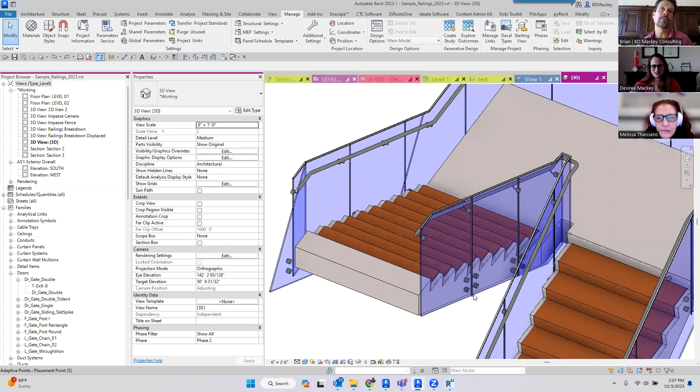One of the families I use quite often is a clevis and rod for all my structural things - architects use it all the time. Oh, I've got to draw this back to there - that's just an adaptive component. I pick here, I pick there, I tell it the size of clevis I want, the size of rod I want, and now that's going to update with everything. So there's a ton of issues, tons of things you can do.

One of the ones I like the most - let's go in and draw a short wall here. All right, we've got a wall here, and then we're going to take another wall over here. Let's say we're going to be doing some sort of weird soffit, and let's just say this is going to be 8 feet up, and this one's unconnected at 8 feet. I probably should make this one 9 feet. So you wanted this one to be like, oh, I need to do a slope soffit here. I've got the vertical face of the soffit here, but I need to figure out a slope from there to there.

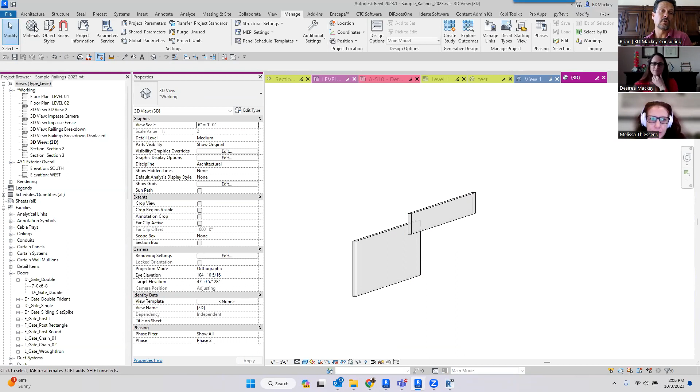One of the easiest things to do for an adaptive component is create this. And what a lot of people don't know is wall by face can host to generic models. So if I come in here and do new, it'll probably be faster to create this new family and try to find where I might have a simplified version of this. Go to the English Imperial - I'm going to grab curtain panel by pattern. You got Ben all excited about the adaptive component foundation.

What is it? Generic model, pattern based. Okay, this is going to be the simplest family you're ever going to create.

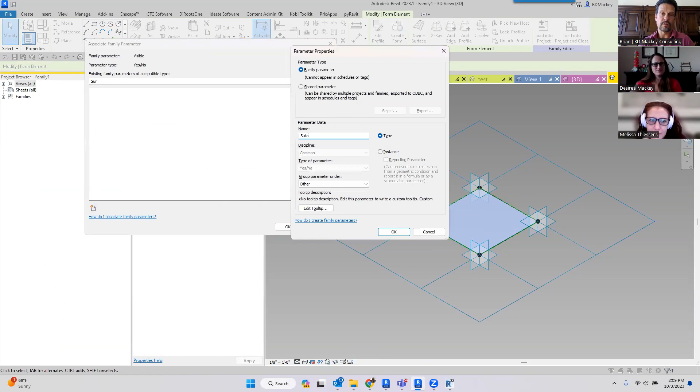I'm going to take these reference lines, say create form, and tell it I want a surface, not a solid. I'm going to grab that and give myself the capability to toggle it. Surface - so I got to create the new button first. Surface. All right. I'm going to load this into my project. Easiest family you've ever created in your life.

I was doing that in my sample railings. So what's great about this family now is I'm going to go back to my 3D view. I'm going to go place this component - I'm going to literally grab that end, this end, this end, and this end. All right, so I've got my generic model there.

Because now I can go in here and say, cool, let me go to architecture, let me do wall by face. Let me choose that face. I've now put a wall there. Should have probably drew it the other direction. So they are directional, so I should have placed it in the other way, but we're running out of time.

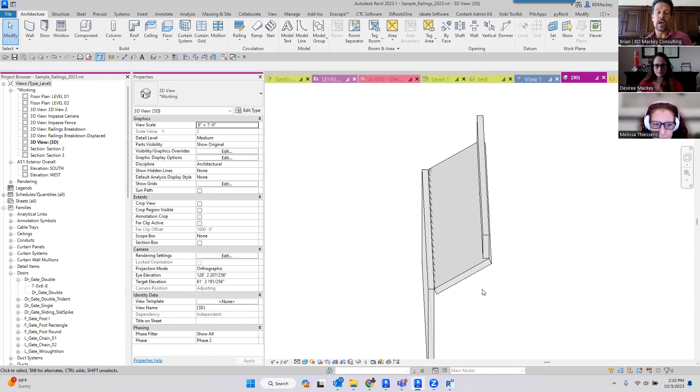I can move this, and that adaptive component updates with it, right? I can change the length. Then I can just grab that adaptive component and say related hosts, update to face - I have now updated that sloping soffit. Oh, what am I thinking? This should have been at 10 feet. As I change this, I can start going through again, either grab that, say update to face, and now I've updated that. So a 4-point adaptive family, that quick to create, could be 6-point, could be whatever you need to do, and then say wall by face, roof by face. You've now got that going through, and you've now created your slope soffit.

And I still do this in lieu of the sloping walls because it's a hell of a lot easier to figure out this than it is to try to go do a sloping wall that you've got to try to then figure out the angle, etc. when you're doing it.

So tons of uses. You just got to start thinking of, hey, these can host the objects within a project. On my roof cricket family, I've done a roof cricket family for 15 years now using adaptive components. And it adjusts if the roofs adjust as well.

And now we're 10 minutes over. And Melissa still wanted to have angry hot takes on AI. Go.

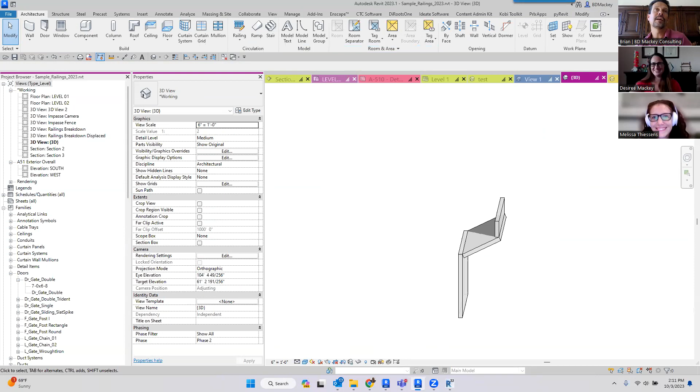Angry hot takes on AI. Hey, I know what you're talking about, man. I love AI because I just got the new Windows update for my Copilot, which gives me AI at my fingertips with Windows 11 and Bing Chat. This is so cool. Let's see, Revit, adaptive component, how to. Cool. So we've got that right there at our fingertips. I don't even need to do Revit radio anymore. We're just going to use this AI personal assistant. What is it called? I don't even remember. It came up yesterday when I installed it. My Copilot. See, there you go. Why do you guys even need me? You've now got Copilot to replace Revit radio.

Basically, to do the Google search for you. Exactly. I was literally like, or just Google Brian Mackey adaptive components, and like a gazillion blogs and conference papers will probably come up. Yeah, mine don't even come up in here. I've actually literally even put my AU family title in here, and it doesn't even come up. We had it was a while back where we had a bunch of people over for dinner, and we had a contest of if ChatGPT knew who you were. If we had enough internet presence for ChatGPT to know us.

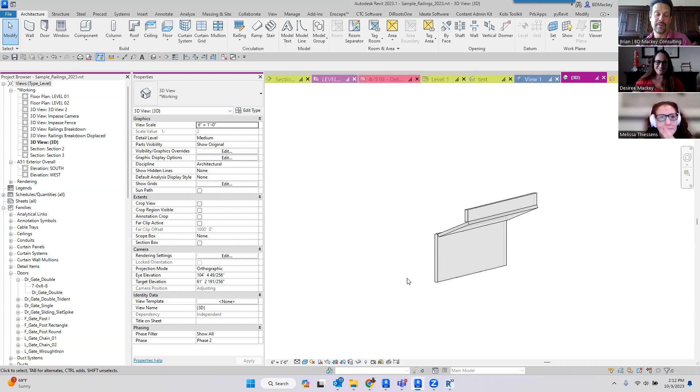Where do you find time in a workday to make all these very cool families? Decades, Rick. Decades and decades. Part of it is I start creating it for a client, and then I just go over the top. So if you really want to see an adaptive component family, this is me. This is my simple 4-point panel family.

That's the split version, that's my tapered version. So this is my 4-point adaptive component family. You will see that there is not a single dimension that controls anything. These are all just reporting parameters.

But if I were to select this rectangular adaptive component family and look, I have 38 reference points, 12 reference lines inside of here, just for my 4-point adaptive component family. But the nice part about this is I can move it any way I want. Move it up, down, it'll start to warp, it'll tell me the deformation. I can extend it past where I clicked on the project, so I can make it go past or short, inside or out at any one of those corners.

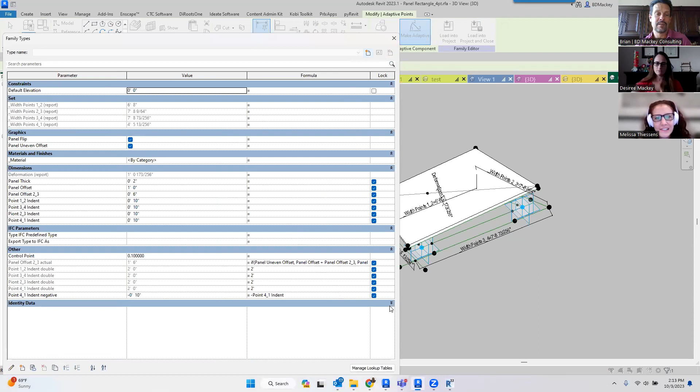So again, this was me starting with that 4-point adaptive component family to put a wall by face, and then just going and going and going farther and farther until it's become something that's just insanely crazy. But the parameters actually don't look that bad. When you look at it like, hey, this is not that bad. It's literally not.

Yeah, Desiree did an entire bridge a few jobs ago, 100% done out of adaptive components. And there was that arena roof. Remember the double T that was sagging with the water? That was adaptive components. I was trying to think. Well, no, the water was an adaptive component that I couldn't just let you draw filled regions in. That, yes, I know, but there was other things in there.

It's bad when you're Googling yourself to remember what you've done. Yeah, I was trying to come up with one of mine. Can't do that in public. You know, the best is when Brian Googles something because he can't remember, and his own blog comes up, and he's like, 'Oh yeah.'

Yeah, so here's some adaptive components. Here's Desiree's adaptive water volume because she was going to draw in filled regions here, and I'm like no, because as these warp and curve and do whatever we need to do, we need to have this all update. So we did that one too.

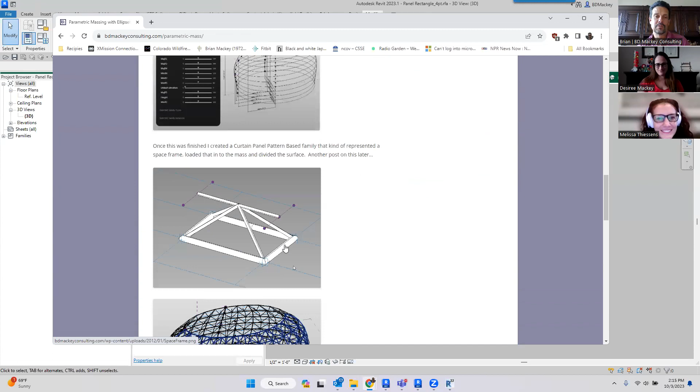Yeah, that was unnecessary, that was 100% me geeking out. It was an expert witness job where it just needed to be pretty in blue. It wasn't ever going to change. Is that this one I'm thinking of? Yeah, this was way old, back when Vasari gave us sliders before we had the massing environment. But this was me doing a space frame and then just having some fun with Vasari.

Moment of silence for Vasari. Moment of silence. God, when did I post this? That's a long time ago. Ask AI, I was trying to see when it was posted. It doesn't. I think that's when it first came out and we were just messing around.

2012. Wow. And 2012 is when we got the repeaters. Prior to that, it was no repeaters. You're old, man.

I would open this model for you all, but I probably can't due to... you were so far over time. People are like, whatever, if they're still here, cool.

So this was 100%, that model was done in Revit, 100%, all adaptive components for the entire skin.

Oh, there's a YouTube video on it? See, I didn't know there's a YouTube video on it. But yeah, so if you want to, I think that was done in Revit 2010 or 11, before we had repeaters, and the person doing it literally had to go in and click all the points, and the points were like 28 point panels, so we had to click 28 times for each panel. If you misclicked on one of them, you're like, damn it.

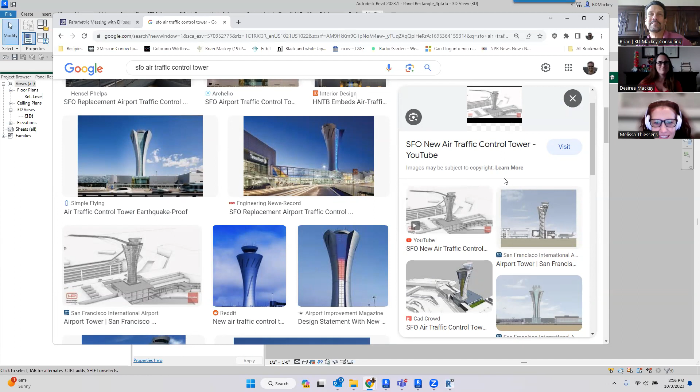And Scott wants you to do a live Revit Radio from AU next month. I would do that if he gets it all set up and gives me decent internet. Yeah, he's not going, so maybe you have to. Yeah, but he wanted it from the sphere. I feel like that's a much different thing. That's a much different thing. But you could, otherwise...